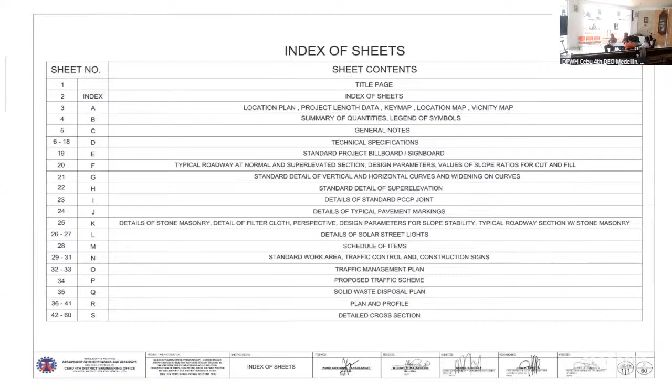Index of sheets: location plan, summary of quantities, general notes, and the following are the technical specifications.

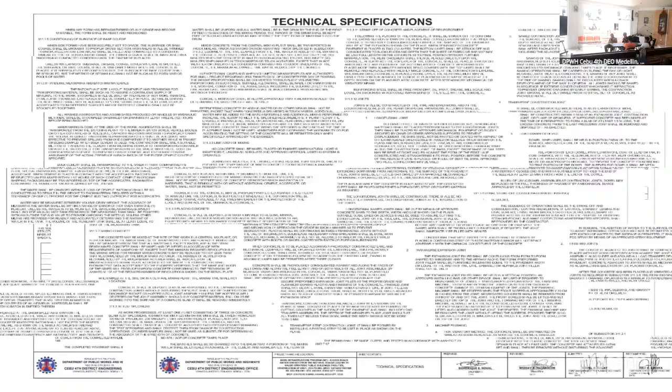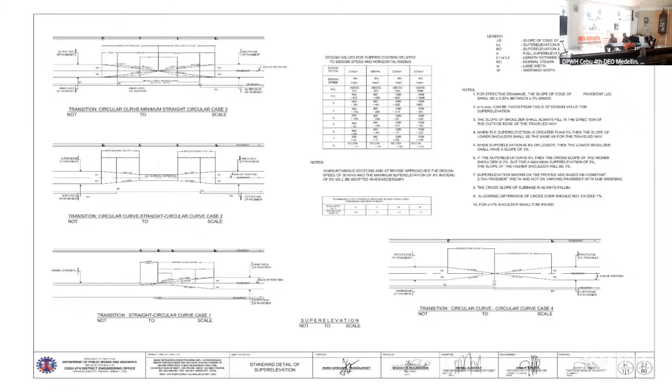Next is the standard project billboard, the typical roadway, and the superelevation.

The standard portland cement concrete pavement joints, the typical pavement marking details, the stone masonry details, the solar street light.

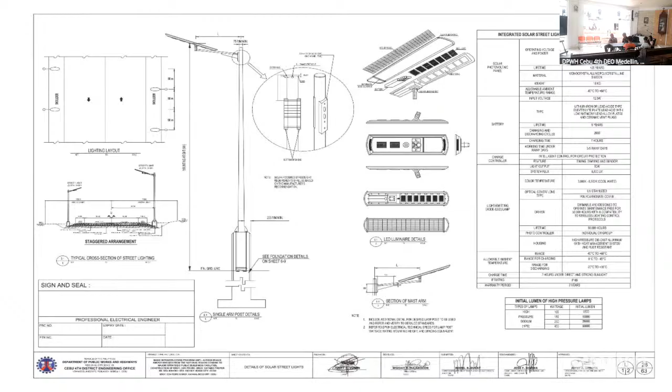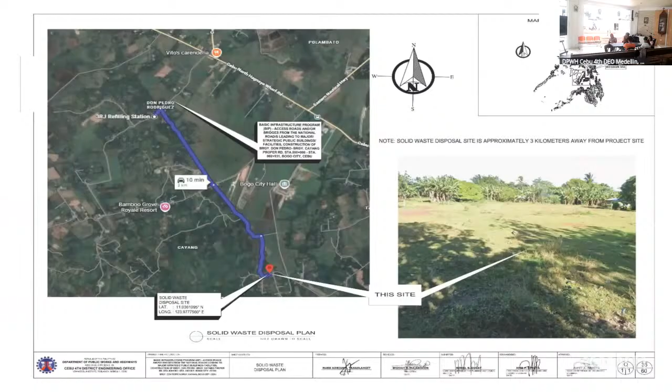Schedule of quantities guidelines, regulatory signs, road safety signs, traffic management layout, proposed traffic scheme, solid waste disposal plan, and the plan and profile.

The following are the detailed cross sections.

Straight line diagram. That's all for the drawings. The next day, equipment requirements.

2 units two-way radio, 8 units barricade flasher light, 1 unit trailer with prime mover, backhoe, 2 units dump truck, 1 unit bar cutter, 1 unit bulldozer, 2 units payloader, motorized road grader, vibratory roller, water truck, 2 units concrete vibrator, 1 unit concrete spreader, 1 unit concrete saw, 1 unit bar cutter, joint sealing machine, bar bender, cargo truck with 9 to 10 ton capacity, 1 bagger mixer, 1 bar cutter, plate compactor wheel type, cargo truck, applicator machine, kneading machine, bar bender, truck mounted crane, equipment capacity, and boom lift.

That's all on this file.

Thank you. Moving forward for project bulk number 2 by Engineer Catino and Engineer Bacos.

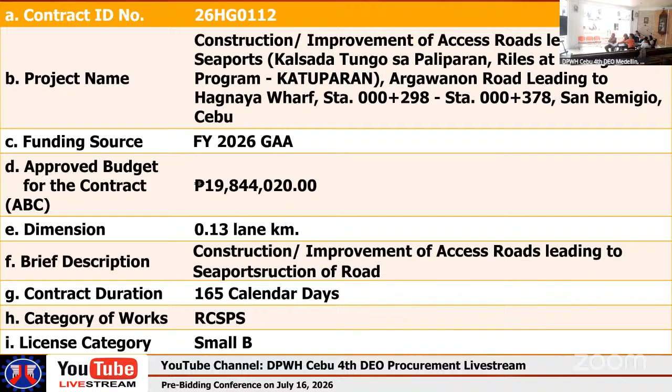Drawings: title page, location map, budget data, summary of quantities and index of sheets, general notes and technical specifications.

Hazard map of San Remigio. Details of revetment and roadway. Detail and perspective, schedule of items, approach details.

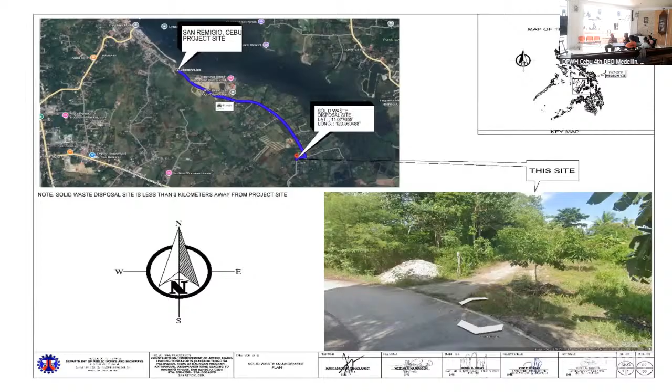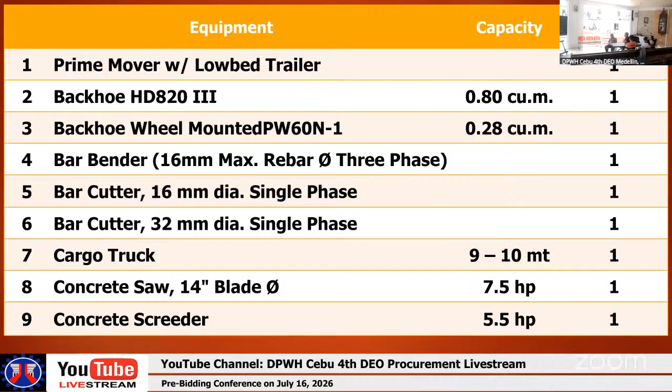1 unit grinder, 1 unit backhoe, backhoe mounted, bar bender, bar cutter, cargo truck, concrete saw, concrete screeder, concrete vibrator 2 units, 2 units dump truck, 1 unit joint sealing machine, road recycling machine, motorized road grader, 1 bagger mixer, payloader, vibratory roller, water truck pump.

Annexures FY26, approved budget for the contract is 64,845,000. Bogo City, 3.2 kilometers. Construction of roads, duration 223 calendar days.

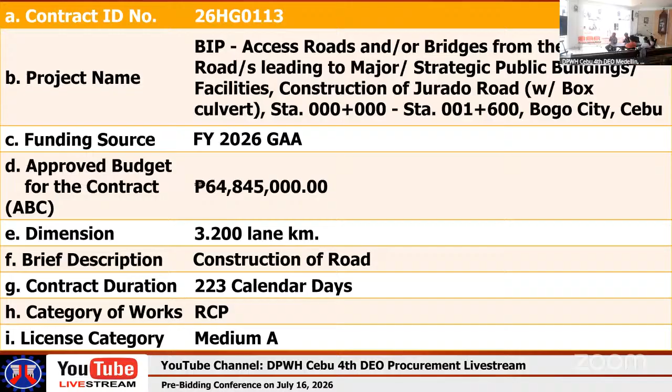Category of works RCP, license category Medium A. Summary of quantities: Item number, Part A facilities for the engineer, Part B other general requirements, Part C earthworks, Part D base courses, Part G drainage structures, Part H miscellaneous structures.

Drawings: title page, location map, summary of quantities and index of sheets, general notes, technical specifications.

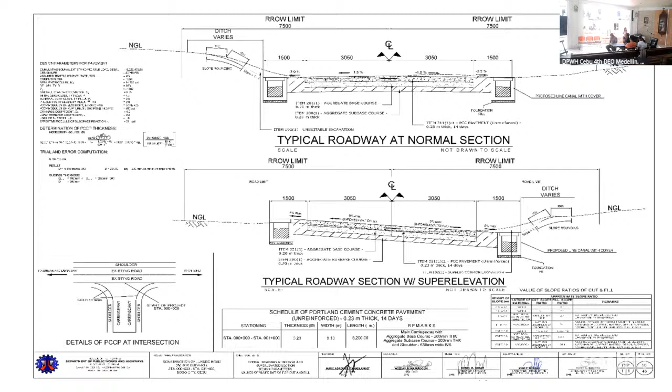Typical roadway sections, details on masonry, detail of line canal and schedule of line canal, methods of pipe installation, manhole details, roadway lighting details.

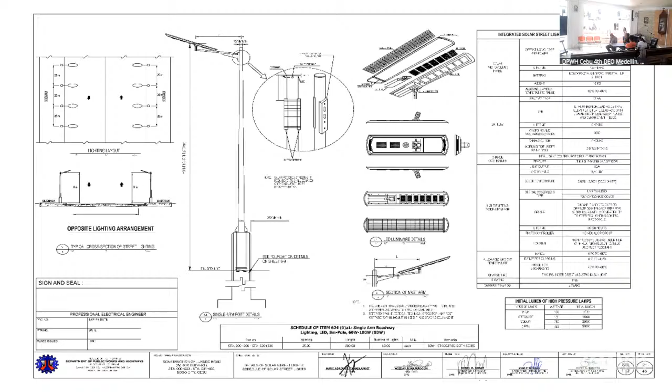Typical pavement marking details, details of specific super elevation details, traffic management layout, traffic management scheme, roadway services.

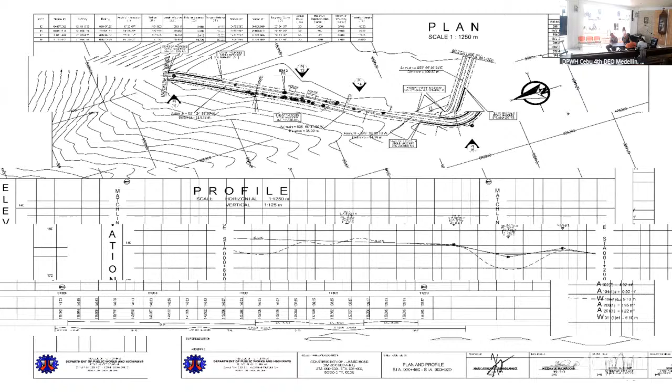Standard project items, solid waste disposal map, plan and profile, detailed projection, straight line diagram, equipment requirements.

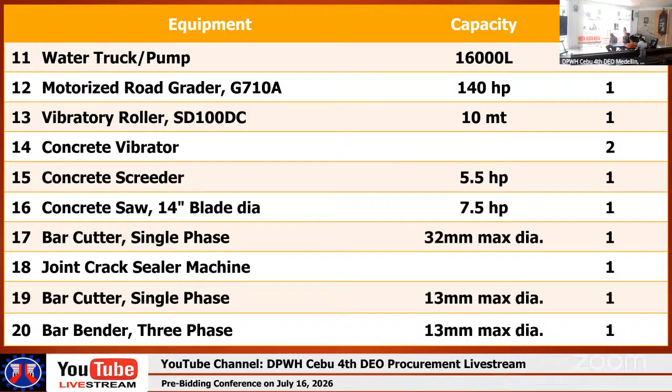8 units barricade line, 1 unit low bed trailer with prime mover, 2 units two-way radio, 1 unit jigsaw, backhoe with pavement breaker, 2 units payloader, 2 units dump truck, 1 unit bulldozer, lane compactor, water truck pump, motorized road grader, vibratory roller, 2 units concrete vibrator, 1 unit concrete screeder, concrete saw, bar cutter, joint sealing machine, bar bender, cargo truck, bar cutter, bar bender, 1 bagger mixer, 1 cargo truck, 1 unit applicator machine, DD machine, truck mounted crane, and boom lift.

Moving forward for project bulk number 4 by Engineer Vizcayang and Engineer Bogo.

Contract ID number 26HG0114. Project name: Special Road Fund Motor Vehicle User's Charge, MVUC, as per RA 11239.

Installation or application of road safety facilities, roadway lighting, pavement markings, road signs along Antonio y De Pio highway, kilometer 109 plus 509 to kilometer 109 plus 579, kilometer 110 plus 871 to kilometer 114 plus 029.

Funding source FY2026, approved budget for the contract 47,518,240. Dimension 247 units. Brief description: installation or application of road safety facilities, roadway lighting, pavement markings, road signs. Contract duration 137 calendar days. Category of works EWCRSD, license category.

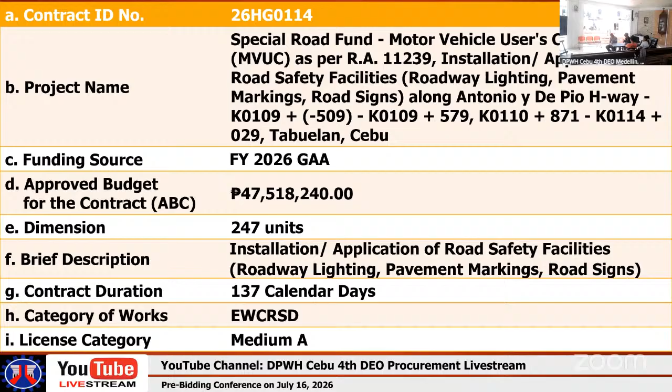Summary of quantities: Part B other general requirements, Part C earthwork, Part G drainage and slope protection structures, Part H miscellaneous structures.

Drawings: project title, location plan, summary of quantities, general notes and technical specifications.

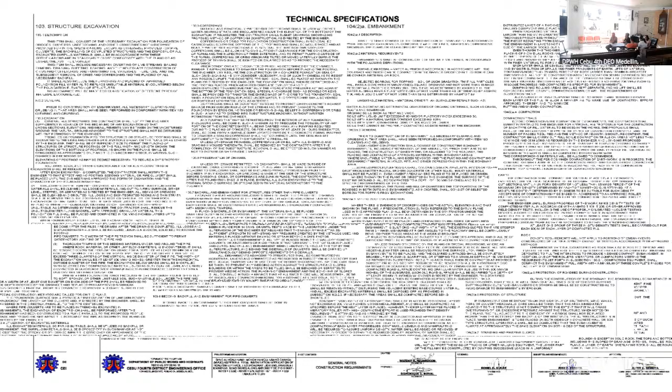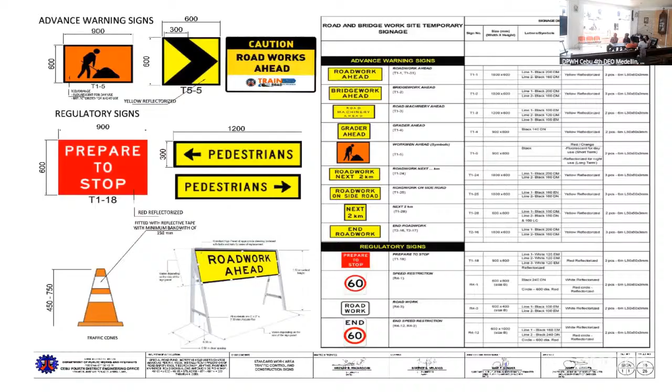Schedule of items, typical solar roadway lighting details, traffic management plan, traffic management signages, project billboard, straight line diagram.

For project profile number 5 by Engineer Bogo, with contract ID number 26HG0115 and project name construction of public water supply system, Barangay Binabag, Bogo City, Cebu.

Funding source FY 2026 GAA, approved budget for the contract 4,950,000, dimension 2,520 linear meters, brief description construction of public water supply system, contract duration 60 calendar days, category works WSL 2, license category small B.

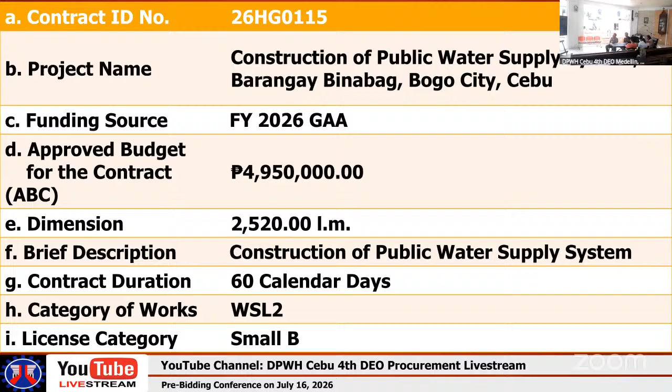Summary of quantities. Part 2, other general requirements. Part A, earthwork. Part B, plain and reinforced concrete work. Part C, plumbing or water supply.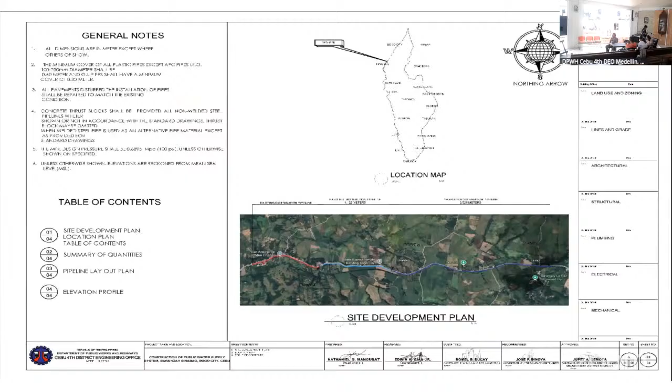Drawings: title page, site development plan and general notes, summary of quantities, pipeline layout, pipeline B to C layout elevation, tapping details.

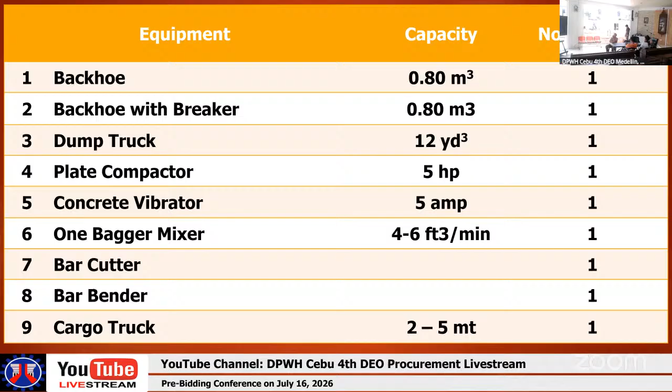Equipment requirements: backhoe unit, backhoe breaker unit, dump truck unit, plate compactor unit, concrete vibrator unit, one bagger mixer unit, bar cutter unit, bar bender unit, cargo truck one unit.

Approved budget for the contract 2,970,000, two-story building, with description rehabilitation, completion of multi-purpose building, contract duration 30 calendar days, category works by IC to PLC, license category small.

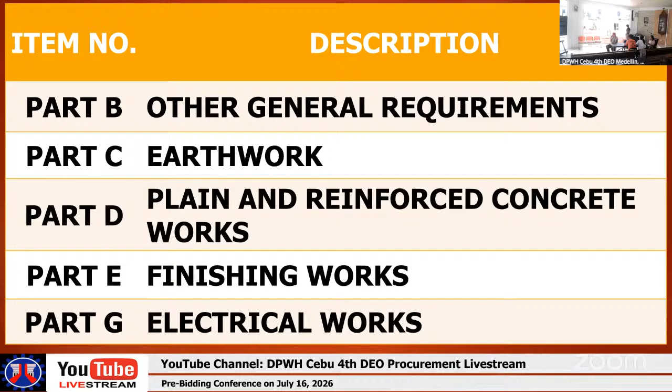Summary of quantities: Item number, Part B general description, Part B other general requirements, Part C, Part D works, Part E finishing works, Part G electrical works.

Drawings: title page, perspective and site development plan with vicinity map and details in place, summary of quantities, ground floor plan, elevations, sections.

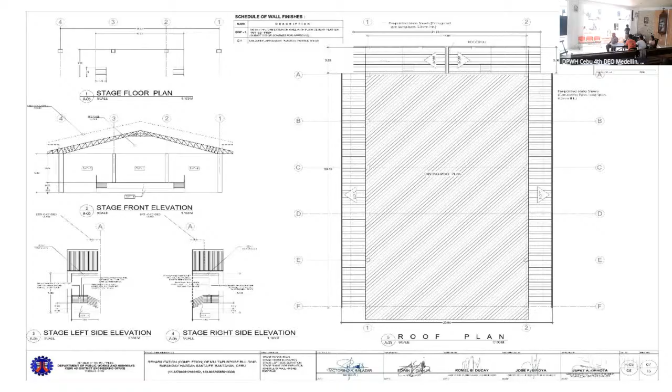General construction notes: foundation plan, footing elevations, roof framing plans, beam layout plan, truss details including the louver details.

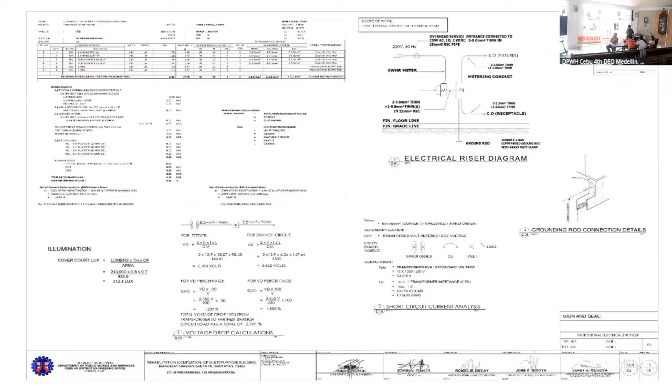General electrical notes, site development plan, single line diagram, lighting layout, power layout, schedule of units, and the electrical riser diagram.

Equipment requirements: backhoe 1 unit, truck 2 units, plate compactor 1 unit, concrete vibrator 1 unit, one bagger mixer 1 unit, bar cutter 1 unit, bar bender 1 unit, welding machine 3 units, cutting outfit 2 units.

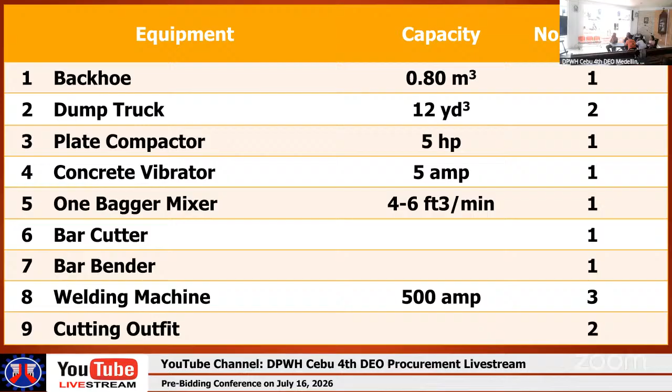Funding source, approved budget for contract 4,950,000 pesos. This is a two-story building with a brief description of construction and completion of a multi-purpose building, with 60 calendar days, category works by IC to PLC, with a license category of small.

Summary of quantities: Part B other general requirements, Part C earthwork, Part D plain and reinforced concrete works, Part E finishing and other civil works, Part F plumbing works, Part G electrical works, Part H miscellaneous structures.

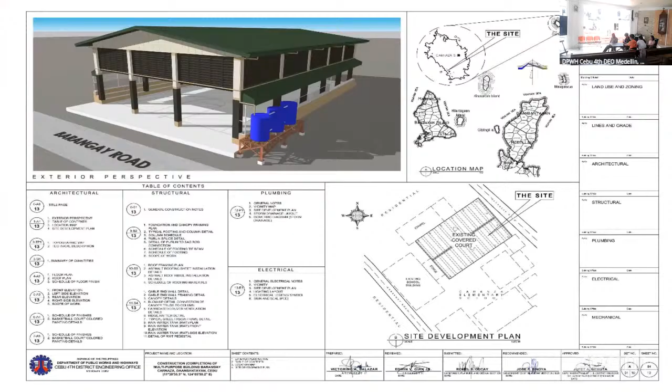Drawings: title page, exterior perspective with a location map and site development plan, topographic map, summary of quantities, floor plan, roof plan, elevations, sections including the canopy plan.

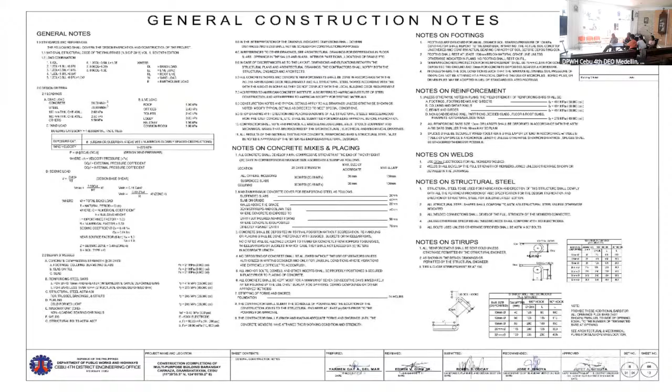Basketball court color painting details, general construction notes, foundation and canopy framing plan, typical footing and column details including the column schedule and footing type schedule, roof framing plan, truss details including the louver details and fascia frame details.

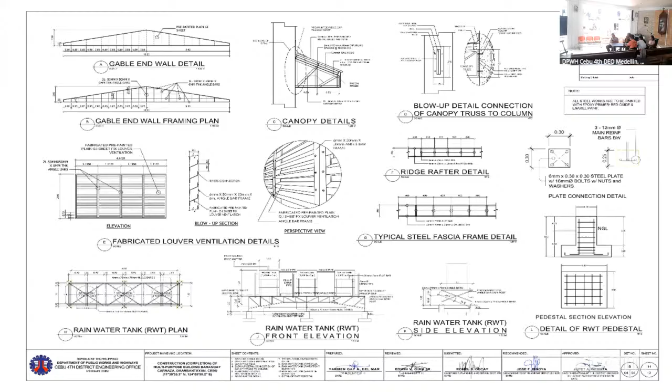Storm drainage layout, site development plan including vicinity map, general notes and schematic diagram, electrical notes, vicinity map, site development plan, lighting layout, equipment requirements.

Backhoe 1 unit, dump truck 3 units, plate compactor 1 unit, one bagger mixer 1 unit, bar cutter 2 units, bar bender 2 units, welding machine 7 units, cutting outfit 3 units, truck mounted crane 1 unit, jackhammer 1 unit.

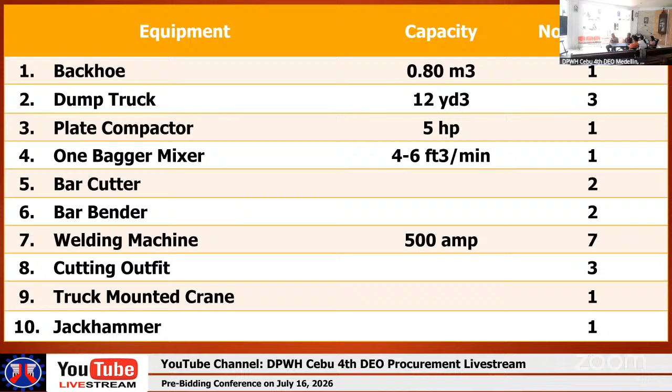Summary of quantities: Part A facilities for the engineer, Part B other general requirements, Part C earthwork, Part D subbase and base courses, Part E surface courses, Part G drainage and slope protection structures, Part H miscellaneous structures.

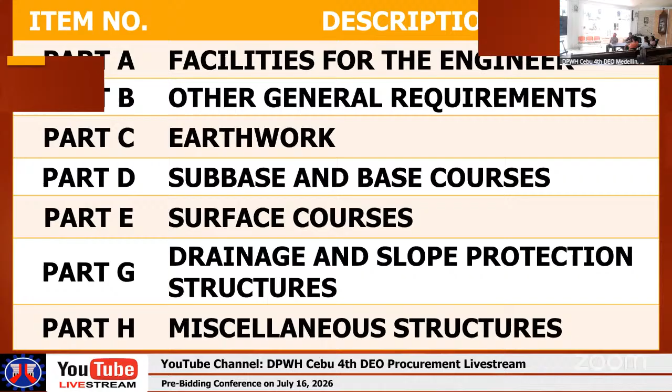Drawings: title page, location plan, summary of quantities, general notes and technical specifications.

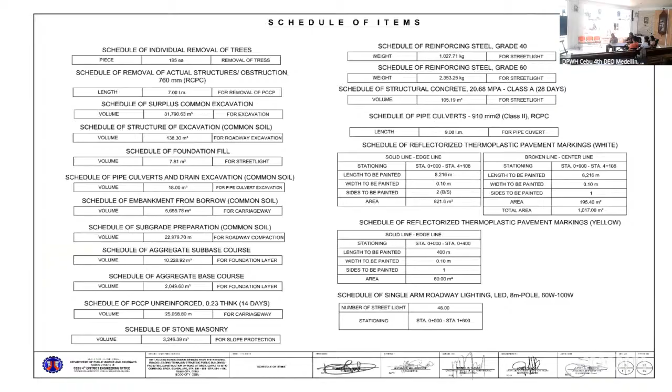Schedule of items. The typical roadway sections. Slope protection details. Pavement marking details. The typical pavement joint details.

Solar elevation detail. Solar roadway lighting details. The traffic management signages. Project board.

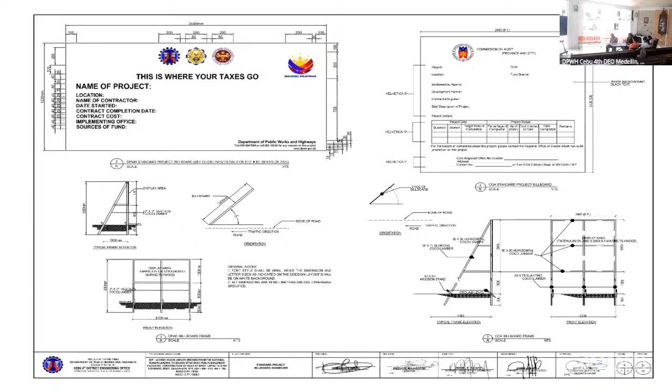Traffic management layout. The traffic management scheme. Disposal plan. The plan profiles. Detailed cross-sections.

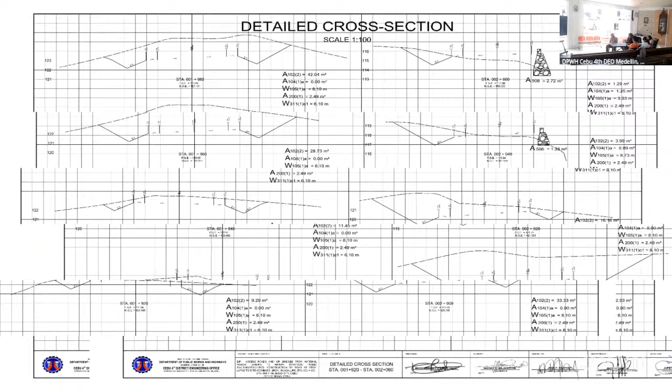A straight line diagram, equipment requirements: 2 units two-way radio, 8 units barricade flasher light, lowboy trailer with prime mover 1 unit, backhoe 1 unit, 2 units

of dump truck, 1 unit of chainsaw, bulldozer 1 unit, 2 units of payloader, motorized road breaker 1 unit, vibratory roller 1 unit, water truck 1 unit, 2 units of concrete vibrator, 1 unit of concrete spreader,

Project number 9 by Engineer Escalar and Engineer Bogo. Contract ID number 26HG0119. Project name: BIP access roads and road bridges for national roads, including major strategic public buildings and facilities.

Length 0.416 lane kilometer. Brief description: construction of road. Contract duration 54 calendar days. Category of works RCP. License category small B.

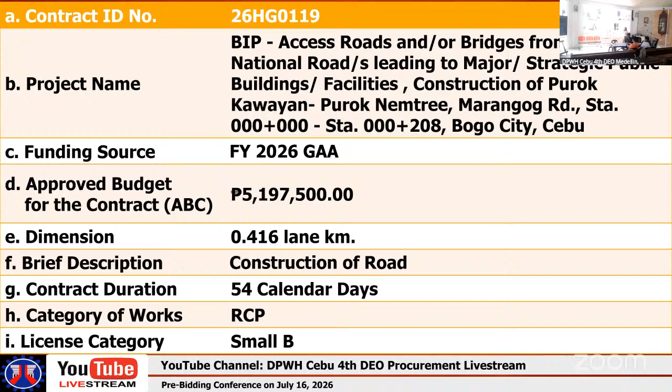Drawings. First is the title page, the location plan, summary of the quantities and index of sheets, general plans and the technical specifications.

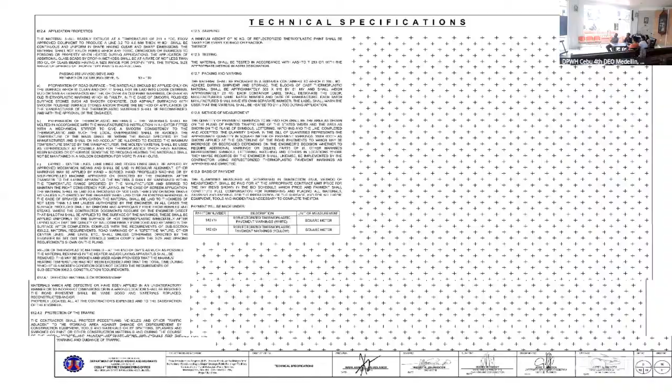Schedule of items. Typical roadway section. Details of stone masonry. The details of pavement markings. Detail of PCCP joints. Detail of horizontal and vertical curves and widening curves. Details of super elevation.

Work area traffic control and construction sites. Standard project billboard. Traffic management layout. Traffic management scheme. The solid map, disposal area map. Plan and profile. Detailed intersection.

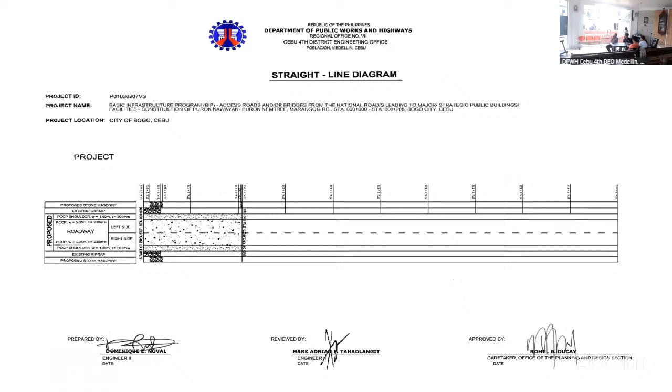And a straight line diagram. Equipment requirements: 2 units of two-way radio, 8 units of barricade flasher light, 1 unit of lowboy trailer with prime mover and backhoe, dump truck 2 units, 1 unit of chainsaw, bulldozer, 2 units of payloader, 1 unit of motorized road grader, vibratory roller, water truck or pump, 2 units of concrete vibrator, 1 unit of concrete spreader,

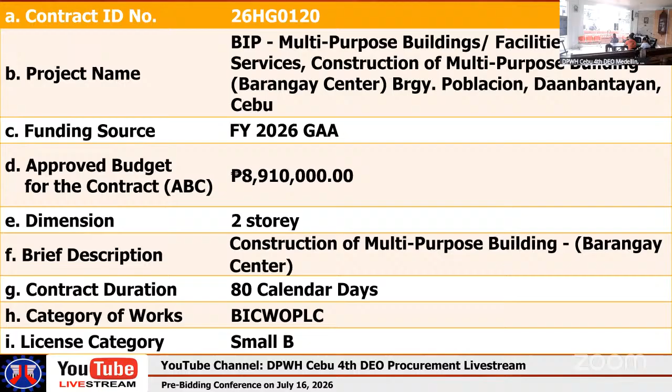BICWOPLC, license category small B. Summary of quantities.

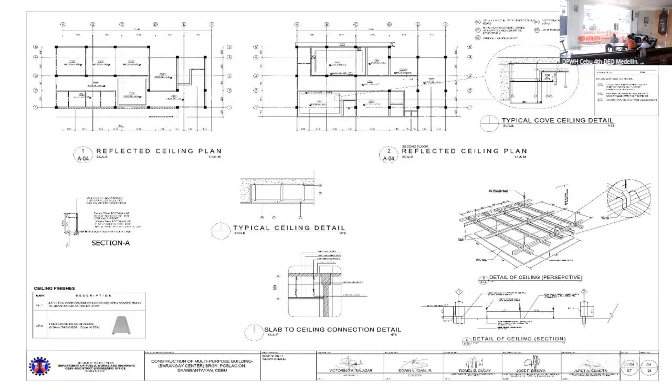quantities, ground and second floor plan, grading details, roof plan, other details. Front elevation, right side elevation, left side elevation, sections, reflected ceiling plan for ground and second floor, tie beam plan.

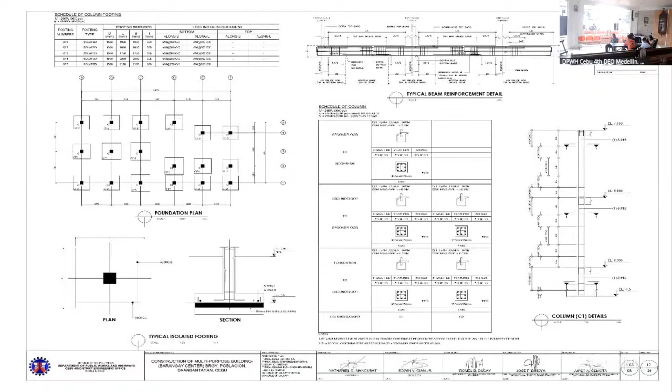Slab to ceiling connection detail and ceiling, door schedule and window schedule, restroom details, ground details, ladder ground details, fire exit details, stair details, general construction notes, typical isolated footing, foundation plan, schedule of footing, schedule of columns, typical reinforcement details.

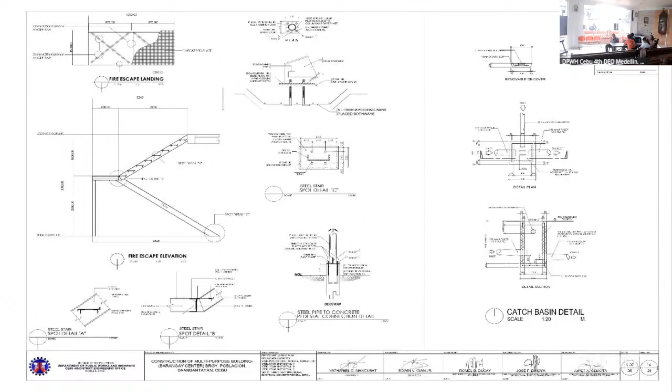and other connection details. Plumbing: general notes, sewer line and drainage layout for ground and second floor, water line layout for ground and second floor, water line layout for roof drainage, rainwater catchment details, isometric layout for water line and sewer line details, isometric layout for plumbing.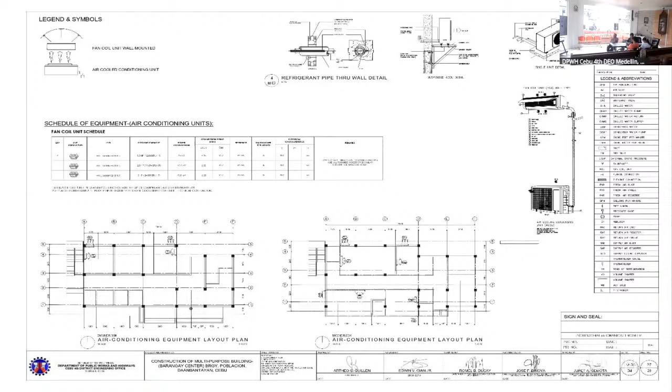Schedule of equipment for air conditioning units, air conditioning equipment layout plan for ground and second floor. Schedule of equipment for water pumping system and overhead water tank detail. Equipment requirements.

The coordinates are 11.245273, 124.009445. The funding source is supported with GAA with an approved budget of 5,940,000 pesos. This is a two-story building, with description rehabilitation of the Municipal Circuit Trial Court, for 75 calendar days, category of works BIR, license Small B.

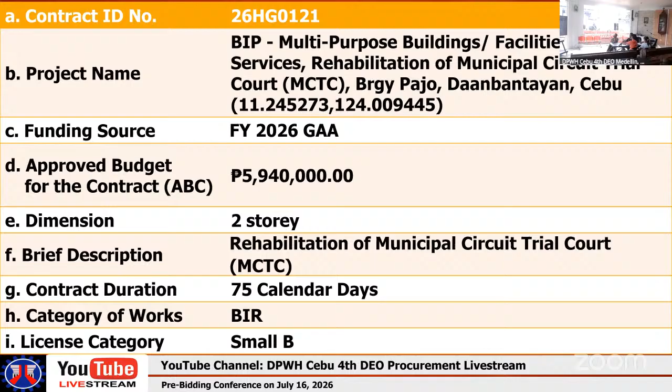Summary of activities. Part B, other general requirements. Part C, earthwork. Part D, reinforced concrete works. Part E, finishing works. Part F, plumbing works. Part G, electrical works. Part H, miscellaneous structures.

Drawings: title page, vicinity map, table of contents, perspective, and site development plan. Topographic map. Summary of activities. Existing ground floor plan, existing second floor plan, roof plan, and scope of works.

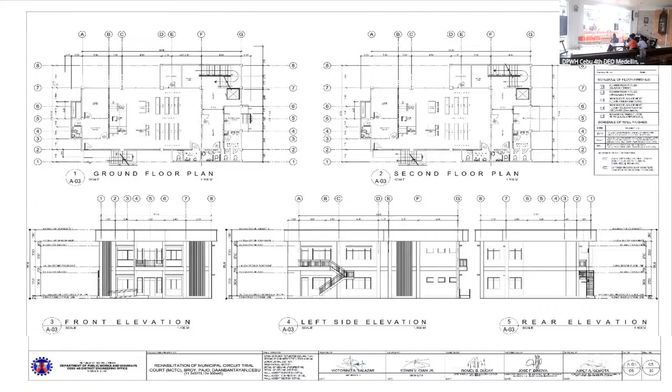Proposed ground floor plan, proposed second floor plan, and elevations. Reflected ceiling plan and ceiling details, ceiling section and perspective. Schedule of doors and windows.

Detailed plan of PWD ramp. Detailed plan of stairs. Detailed elevation of fire escape, detailed plans of fire escape. Lateral details, detailed plans for toilet.

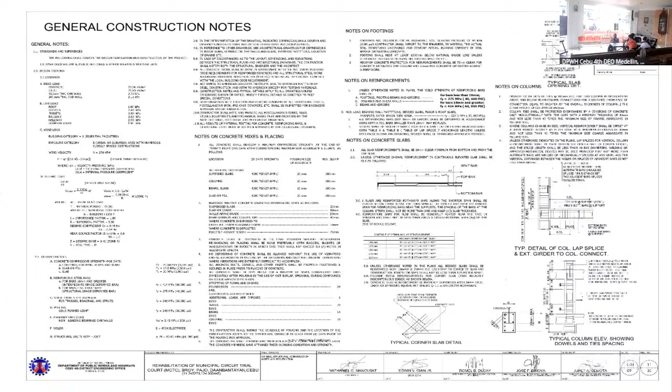General construction notes. Foundation plan, footing and piling schedule. Foundation, footing and piling framing plan, typical beam reinforcement detail, schedule of beams. Second floor beam framing plan, schedule of roof beam and beams, schedule of slab, typical slab details.

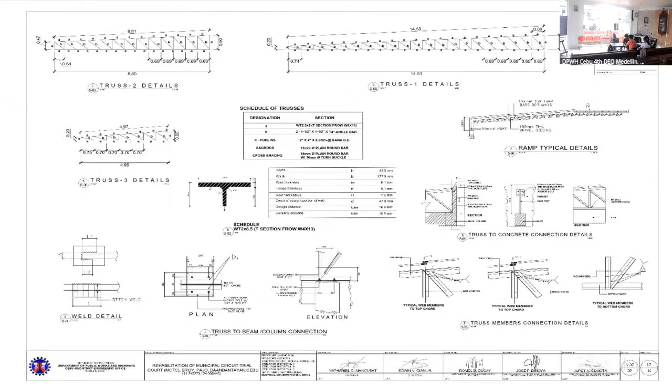Roof beam framing plan, roof framing plan. Trusses, detailed elevation fire escape details, structural details. Other connection details. General notes for plumbing.

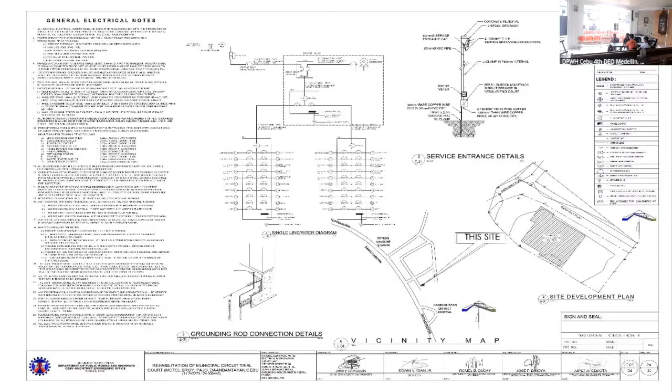General electrical notes, single line diagram, grounding connection details, service entrance details. Other schedule of loads, electrical riser diagram, concrete pedestal connection details.

Lighting layout for ground and second floor. Power layout for ground and second floor. General notes for mechanical, drawing and specification details. Schedule of equipment, ground and second floor air conditioning layout, and fire protection layout, fire extinguisher layout.

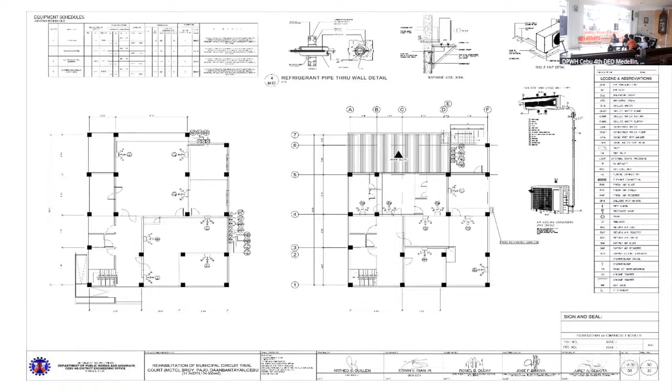Schedule of equipment and other technical details. Equipment requirements: 1 unit of backhoe, 1 unit of dump truck, 1 unit of plate compactor, 1 unit concrete vibrator.

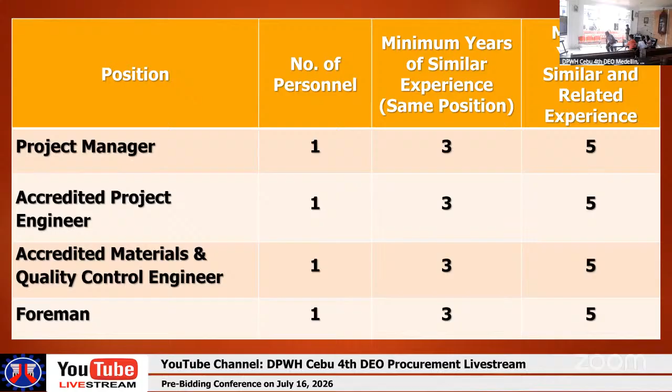For the personnel requirements relating to the aforementioned infra projects, we require one personnel each as project manager, accredited project engineer, accredited materials and quality control engineer, and foreman, with 3 minimum years of similar experience in the same position and 5 minimum years of similar and related experience.

For the plans and drawings of these projects, they are already downloadable and made available on the PhilGEPS websites.

The Class A documents are the legal, technical, and financial documents. Legal documents are: first, the registration certificate from SEC, DTI for sole proprietorship, or CDA for cooperatives; second, the mayor's permit issued by the city or municipality where the principal place of business of the respective bidder is located; and third, the tax clearance certificate as finally reviewed and approved by the BIR.

For technical documents under Class A documents: first, the PCAB or special PCAB license, in case of joint venture a valid special PCAB license and registration for the type and cost of the contract for this project is required. Second, records of all its ongoing government and private contracts, including awarded but not yet started projects. And third, records of the single largest completed contract, or SLCC, similar to the contract to bid.

For financial documents, part of the Class A documents are: first, the audited financial statement stamped and received by the BIR or its duly accredited and authorized institutions; and second, an NFCC of at least equal to the ABC. These comprise the Class A documents.

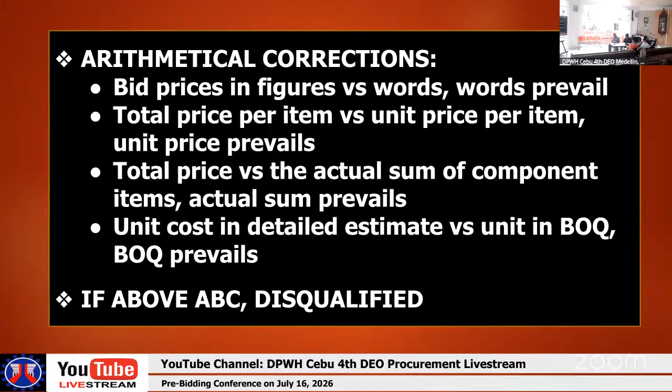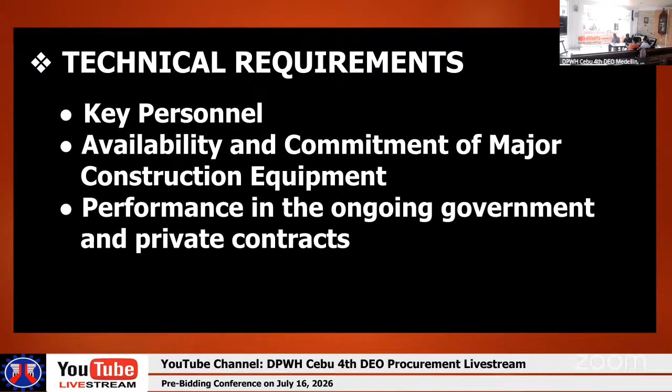For the legal requirements: the licenses, certificates, permits, agreements, and exclusion from any blacklist. For the financial requirements: the bid security, bid price proposal, and NFCC. For the technical requirements: the key personnel, availability and commitment of major construction equipment, performance in the ongoing government and private contracts, and authenticity and correctness of bid security.

For the post-qualification procedure, within a non-extendable period of five calendar days from the receipt by the bidder of the notice from the BAC that it submitted the lowest calculated bid, the bidder shall submit its latest income and business tax returns, filed and paid through the BIR Electronic Filing and Payment System or EFPS, and other appropriate licenses and permits required by law as stated in the bids. The BAC DPWH will verify, validate, and ascertain all statements made and documents submitted by the bidder.

For the awarding of contract, the contract shall be awarded to the bidder whose bid has been determined to be the lowest calculated and responsive bid, or LCRB, as a result of the detailed evaluation and post-qualification conducted. Contract awards should be made within the bid validity period.

For questions and clarifications on the project subject to this pre-bid conference, I'm advised to send your letter on or before the 17th day of July 2026, addressed to Engineer Richard A. Villegas, Bids and Awards Committee Chairman, DPWH District Engineer, Procurement Engineer, at our office address, or email us at electronicbids_support@dpwh.gov.ph.